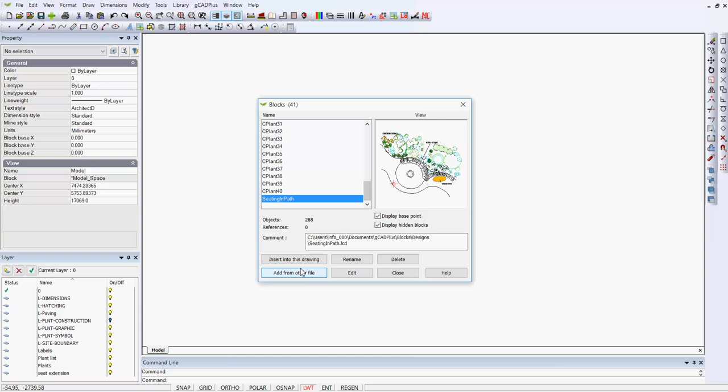The explode option in gCADPlus is designed to break things up, break complex entities up. Let's go to the library, go to Designs, and I'll scroll down here and I'll bring in this particular design. So I'm going to say yes, bring it in and insert it into the drawing. So there's the design that I brought into this particular new design.

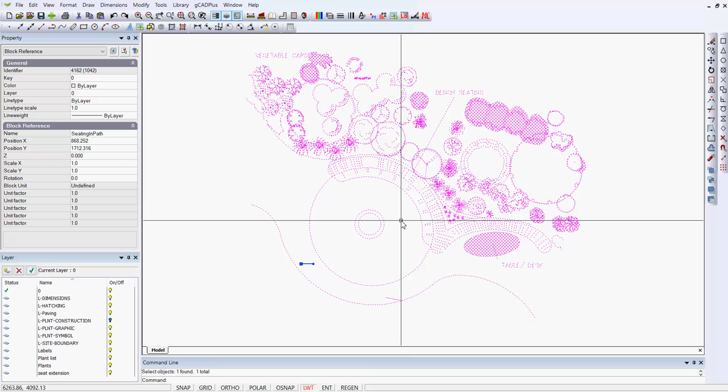If I select that design that I brought in, you can see it's one entity. It's a complex block which consists of lots of blocks inside. So the explode command, I can right click and pick it. Explode has now broken things up. So here we have an arc, here we have another arc, another arc.

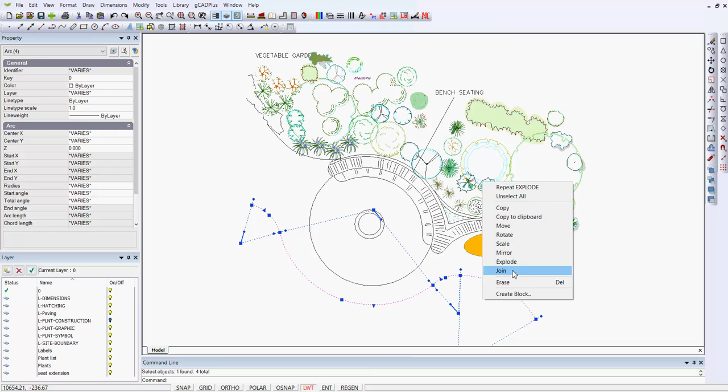So if we joined those arcs together, we would have a polyline, and then if we took that polyline and exploded it, that would break it up into its constituent parts again. So the explode command can break up just about every entity. Fairly obviously, if I drew a line along like so, and then selected it and tried to explode it, nothing would happen. It's still a line. So depending on the entity or what's in the entity, the explode command may or may not work for you.

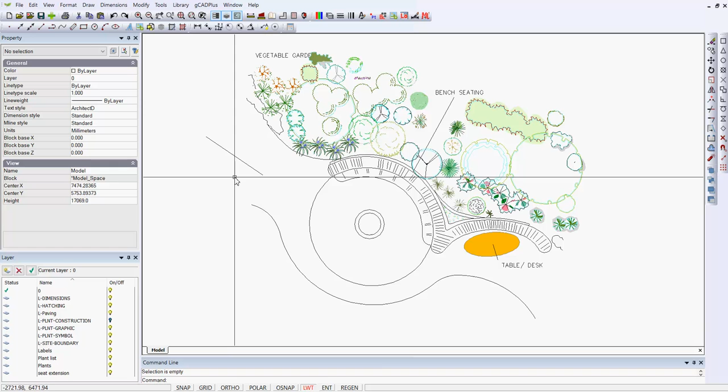Well, the explode command is really useful if you want to redefine a block. Take this symbol here, CPlant24. Can you see, in contrast to this one alongside, the handle, the insertion point, if you like, of that symbol that's selected at the moment is in the center, appropriate, whereas here the insertion point is moved off to the bottom left. So I'd like to redefine that.

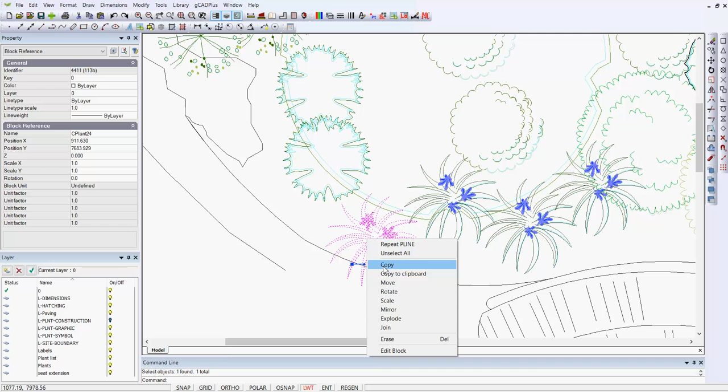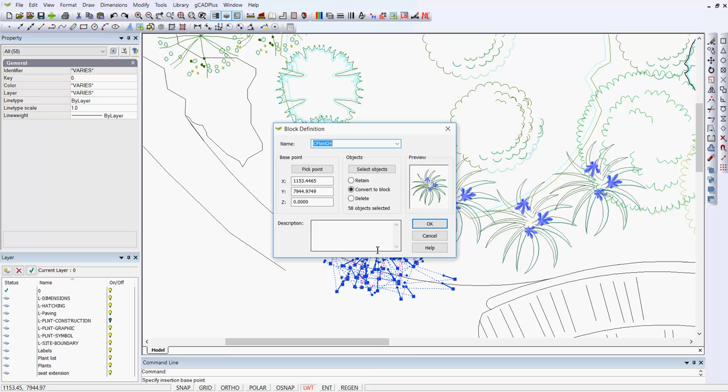So I could select it and explode it, remembering that's called CPlant24. Then I could wrap a selection box around everything in that symbol again, right click and say I'm going to create a block. And there are many blocks in this drawing. Let's go down to CPlant24, and I can nominate a base point by picking in the center like so, and we'll OK it, and we've redefined it. So now we have a handle in the right position. So the explode command's really useful in that particular operation.

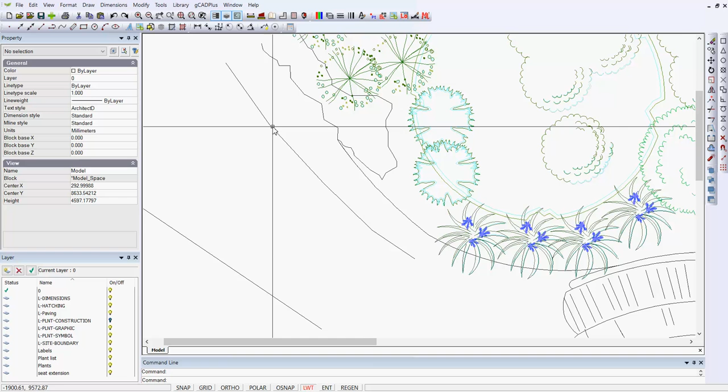This is a polyline here, and we could explode it. That would break it up into its constituent parts. So let's do it. If we pick individual line segments now, we can join them, and it goes back to being a polyline. But notice the short line segments are still there.

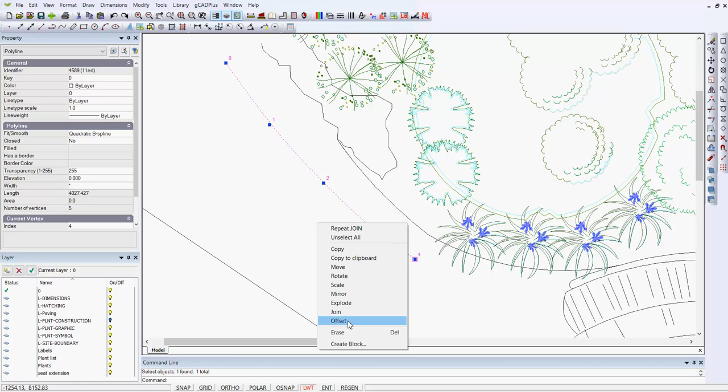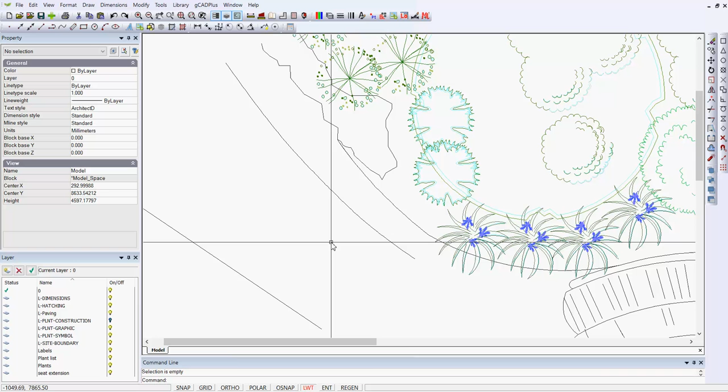If we apply, and this is something to be quite careful about, curve fitting to the polyline, then pick the polyline, and remember curve fitting has been applied, and then explode the line, pick it again, and you see we've now got a huge number of vertices in the polyline, and that could well blow the file size of this drawing up. So the response you'll get using the explode command definitely depends on the entity and what editing operations have been done on that entity.